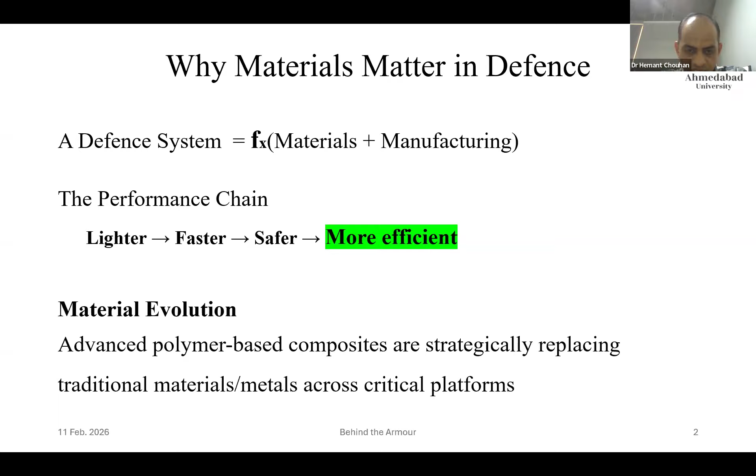In that process, composites or advanced materials play the strategic role and not the conventional materials. That is where it becomes very critical, that we can have a material or a technology initially designed for defense or aerospace, and then it can come down to the normal world, the civilian low-cost competitive environment. That is something I would like to touch upon towards the end of my presentation.

So what are the challenges we face? Defense generally depends on manufacturing capability, and it's not just about R&D excellence, because in my journey I have faced that technologies fail more often at scale up, not at the conceptual level. So there lies a critical gap: is my process repeatable? Can I produce consistently? What are the costing factors? Because at research level, we say that cost is not a criterion. But when we look at forces or aerospace, you have to supply consistently in terms of quality and quantity, and be sure that it will last for the rated lifetime. So what defense needs is a manufacturable design from day one instead of a technology which is only provable on the design table. When we talk of scaling, we face challenges, so we need the design to be manufacturable from day one.

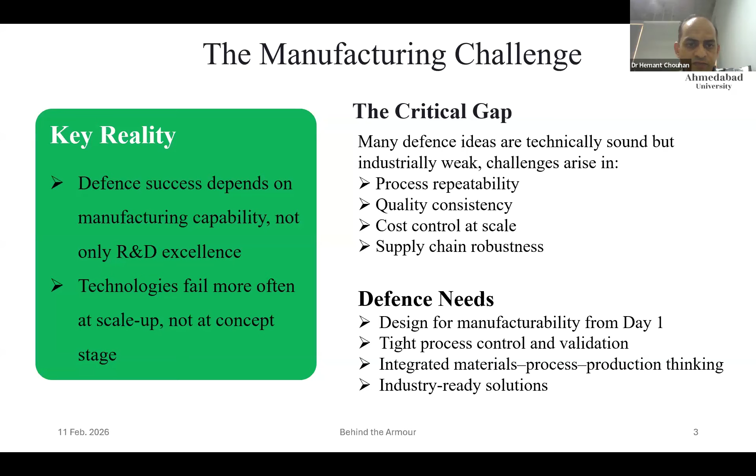We need a tight control over the manufacturing process, control, validation, overall the thought process of production, and that should be presented in such a way that it can easily be absorbed by the industry as a solution. So from this point, I would like to take you through my journey that at research stage, we can develop best of the materials in the controlled environment.

A good quality sample for prototyping and initial testing of force can be done at academia, but ultimately when we are developing a defense solution, it has to go to field for the field testing or the military certification, what we call. So in Indian context, it would be DRDO. You can have an initial tie-up with armed forces or policing, but ultimately it is the DRDO certification that will matter. So we'll come to that as well.

And then they certify that your product qualifies all the environmental or the service parameters as well. Even if academia and defense has developed something, the mass production will always lie with either a public sector or a private sector company who can actually absorb the technology reliably and repeatedly produce the same product in large numbers at cost competitive pricing. And there is a consistent chain right from the raw material to the finished product with the traceability at each and every stage. That is something which is beyond the scope of academia.

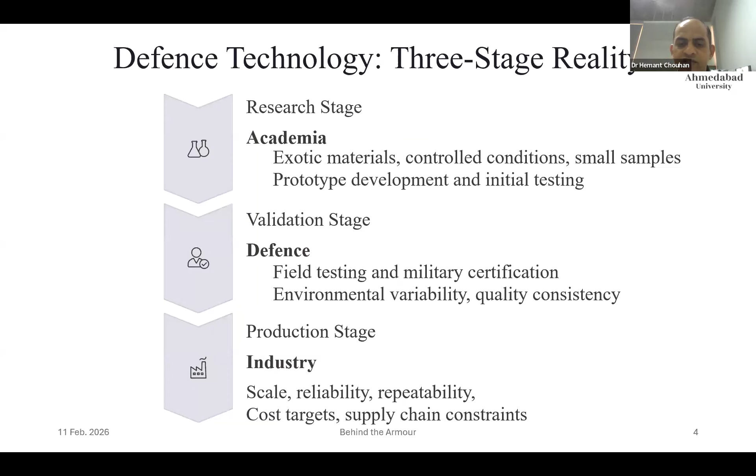We can move from TRL 0 and 1 to maybe at the max 7. The 8, 9, that is field validation, goes to the actual user, that is military in this case, and mass production in any case will be done by industry only. So basis that journey, we found that the materials that perfectly often work in a lab environment, as they migrate to industrial aspect, the things change significantly. So we need to work in such a way that the academia produced products are actually going to serve the nation. Fire. And this is my journey.

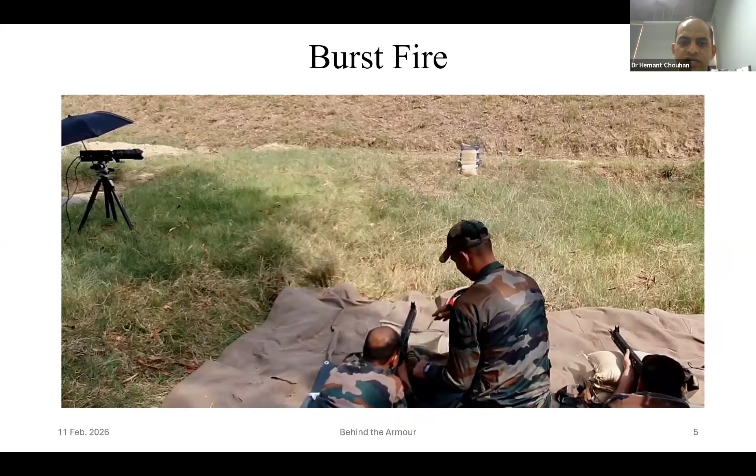So it's less than a second that the journey is over. Now, what all was involved in this journey? And before going into that, theoretically, as per the design, an AK-47 is supposed to fire 600 rounds per minute. Practically, the army people say because of friction and weapon barrel, bullet type, belt type, and whatnot, the practicality is 120 rounds per minute. Still, an AK-47 is firing 2 bullets per second.

And if we have to protect a person from these 2 bullets, which are coming within a time span of 1 second, sorry, 2 bullets in a 1 second time. So it's quite a task. Why it's a task, you'll get to know very soon. Now, when this thing happened, that there is a sound of fire and some bullets were fired, three things happened.

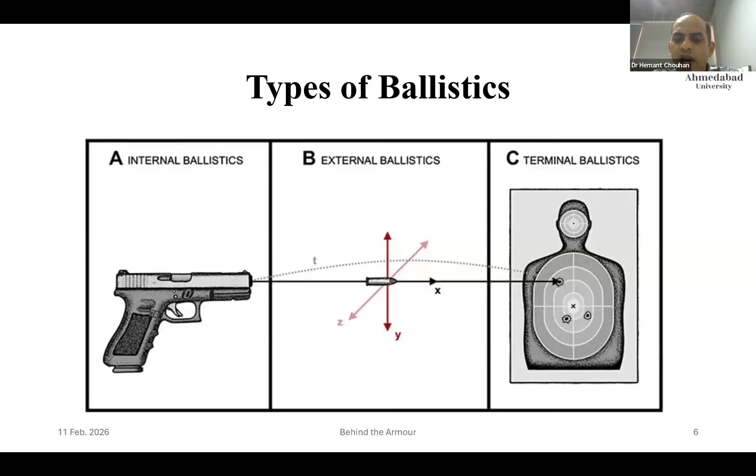There is a term of internal ballistics, that is what is happening inside the weapon till the point the projectile comes into the atmosphere. External ballistics, what happens with the projectile when it starts its journey from the exit point of barrel to the final target. And the final target location, if you are trying to stop the bullet, then we call it as terminal ballistics, that how you are going to handle this projectile. So what do we mean by these?

Internal ballistics basically refers to what is happening inside the barrel. So what kind of propellant, what kind of ignition, what burst pressure, what is the length of the barrel, whether the barrel is smooth or it's a rifled one. Those all parameters along with the aging of the barrel, they will define what is the status of projectile when it leaves the barrel. So you can see a small handheld weapon versus a rifle. So the barrel length changes, the type of grooving and all. They significantly affect.

They affect the journey of projectile, how it will travel in the air from this tip at what speed, whether it's spinning or not, what is the angular velocity, the yaw and precession, what kind of trajectory it will take depending on the location on the earth. The gravitational field will have its own effect, what kind of air resistance and wind drift it is facing, and ultimately depending on distance. Now from the tip of the barrel to the end target, the distance could be few meters to few hundred meters. So accordingly, what kind of residual velocities at the point of impact we are expecting, and this distance we call as the range or the effective range, where this weapon can effectively do its task.

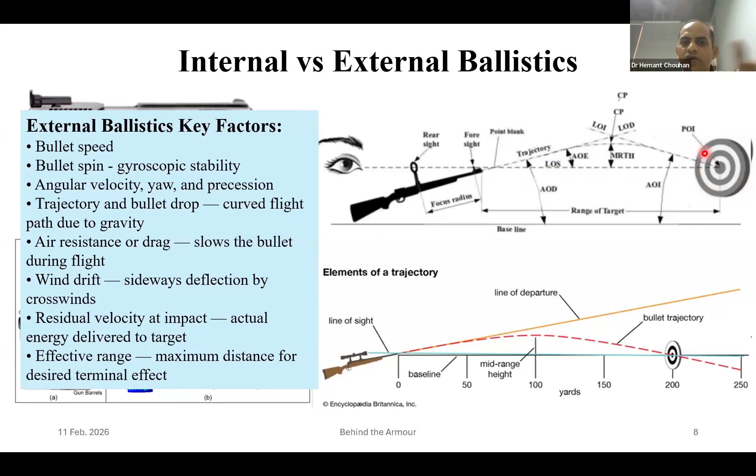Let's call it killing a person in this case. So that is how internal and external ballistics deal with each other. I am more interested in terminal ballistics. That is the study of impact, what happens to that material, will it penetrate or not, and how we are going to handle this impact energy. So that is all about ballistic protection, or simply put, terminal ballistics.

What are the key focuses in this case? Number one, prevent the penetration. If your projectile is penetrating your bulletproof material, the person is dead. Even if the projectile is stopped, what will be the deformation at the back of the panel? If the projectile leads to a significant deformation at the back of the panel, it can lead to, and it does lead to, rib cage breakage, liver or heart or any other critical organ burst.

So that ultimately leads to, even if there is no puncture in the human body, the person is about to die. And these are the versions of the army people whom I met, that the bullet was not penetrated into the human body, but still my soldier died. So those are studies which are not declared, but there are instances, and officially they don't put it in black and white.

Another important thing: deformation is something which we see after the impact. At the time of impact, we actually measure back face signature. What is the peak deformation? From the stress strain curve, we know there are two parts, elastic region and plastic region. Whatever material we are using for bulletproofing application, it will have its own elastic region. So BFD, that is after firing, when we measure the deformation at the back, we call that BFD, that is back face deformation or trauma. But that is the answer when the material has already recovered back, the elastic recovery part of it. So the combination at the time of impact, elastic plus plastic, is going to be higher than the deformation which is only the plastic part of it.

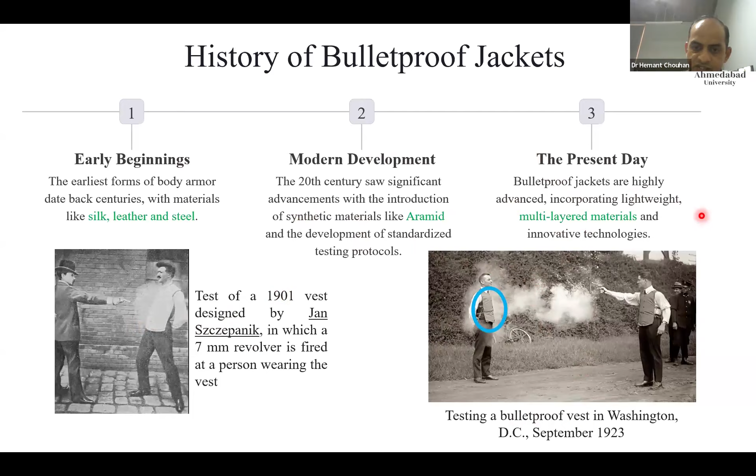Now, coming to the standards, NIJ 0101.06 was the one when we started the journey. This was the standard. Last year, the 07 has come into existence. But more or less, thankfully, the weapons remain the same. NIJ is basically considered the gold standard, and nearly half the globe follows NIJ. Till the end of 2018, India was also following the same. Towards the end of 2018, the Indian government came up with the BIS standard for bulletproofing. We'll discuss that later.

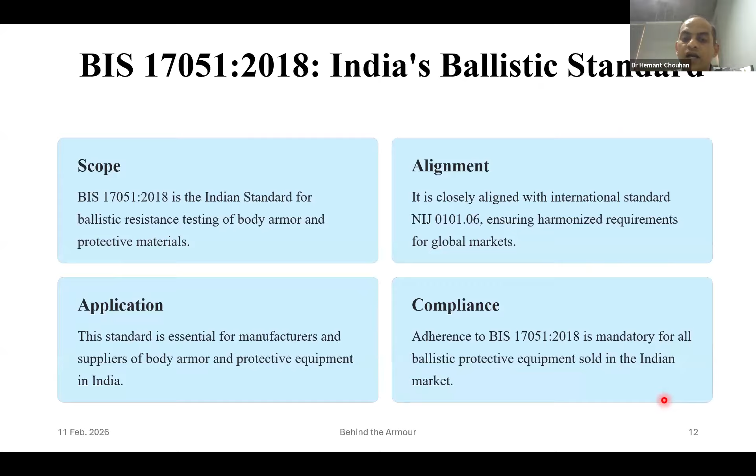In 2018, BIS 17051 came into existence, derived mostly from NIJ, of course. So it aligns very well with that, with the specific requirements of Indian forces. Now, if one has to supply any kind of policing or military related bulletproofing system in the Indian market, then they must meet the BIS. And in fact, the army requirements are even higher than that. So I'll discuss that now.

And the largest projectile that can be fired by a person alone, without any mounting or any vehicle or tank or chopper in the picture, is from the Russian Dragunov, that is 7.62 cross 54 R API, that is armor piercing incendiary. It was primarily meant for puncturing the fuel tank of a tank, and that's why it's called armor piercing incendiary. It has a sparkling element, basically a magnesium phosphorus combination. It is supposed to pierce the fuel tank and then ignite the fuel, so you need not bother much. The vehicle itself will burn out of it.

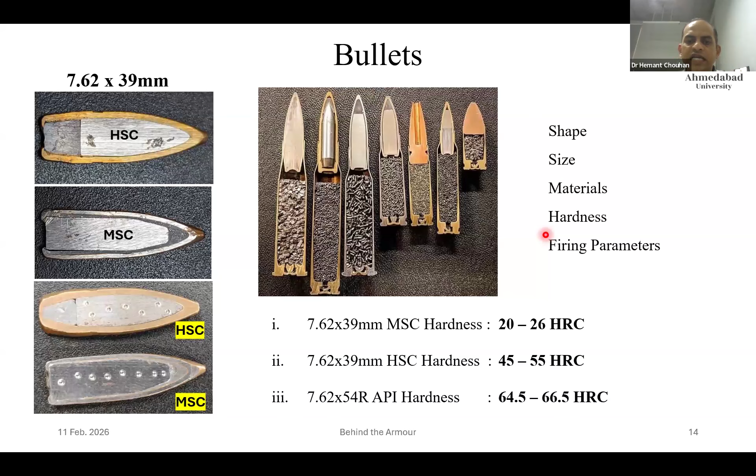Then we have a variety of shapes, sizes, materials, hardness, firing parameters, and the type of explosive being used that will define the velocity. The rifle will define the bore type, smooth or rifled, and if rifled, what kind. So there are so many parameters to be handled. Still, finally, we know that there is one for this and one for that. Now, this was just one of the random discussions. One company from Europe said, no, right now we have 7 options, whatever number you require. Now, all these bullets can be fired from an AK-47.

And we can see there are 7 different types, each one having its uniqueness. So that is where the game becomes more and more complex, how to deal with this kind of scenario. And then coming back to the BIS thing, these are the standards for how much body coverage should be there. So I'll take only one of the parameters.

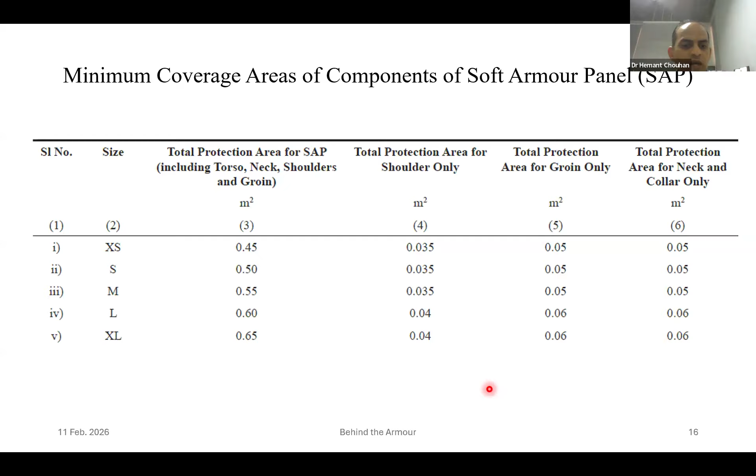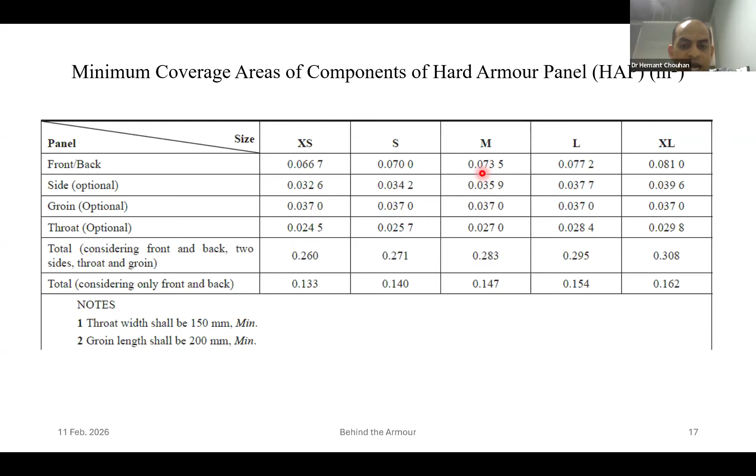Let's say the front, that is the chest of a medium size male. The BIS says that the requirement is 735 centimeters square to be taken care of. But Indian Army demands 1000 centimeters square. The BIS says 6 bullets to be fired, but Indian Army says for AK-47 you need to fire 8 bullets on 1000 centimeter. And for sniper, the global requirement is minimum 1 and maximum 3 bullets, but the Indian Army says rather, 6 rounds to be fired. So that makes the game more and more complex.

Going to the rest of the world, you have European standard, you have NATO standard, you have Australia, New Zealand, Europe, Germany, and so many standards. It simply means so much of variety. And whenever there is a variety, it is from both sides. So I call it a virus versus antivirus. So we are the antivirus developers, the protection side of it. But then the science is also growing in the direction of killing machines.

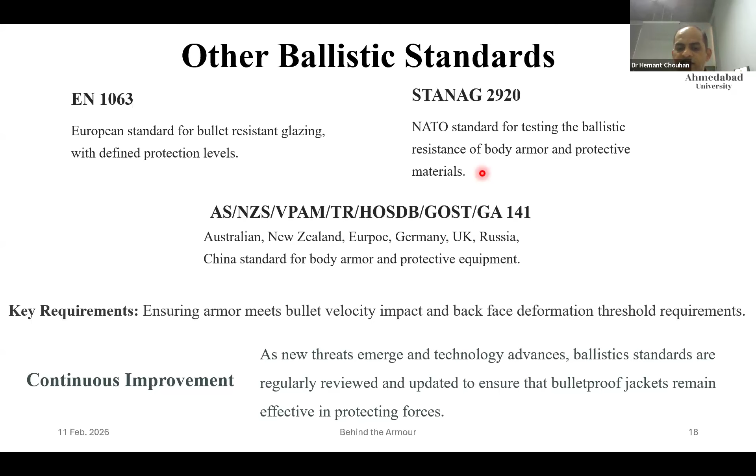There they keep on enhancing or trying to speed material change. Material change is one of the things which is very easy, because your outer cover will always be a combination of some copper brass thing. So you can never know what is the actual hardness and what are the actual inside parameters of the material. So the key requirement is that my armor must meet this impact of a projectile, which I don't know what is inside. And we have to ensure that the back face deformation and back face signature is well within the permitted limits. Otherwise, you are out of business. So there is a constant need of technology improvement as the ballistic standards and weapons grow. So should my jacket grow.

Now, talking of the weapons, this is the smallest bullet. And before we enter into it, let me tell you that a blow of 25 to 150 joules on a human head, properly placed, is sufficient to kill a human. The smallest of the weapons, this is the one which you can see anywhere, a pistol on the back of a policeman. He has this restricted bullet, what we call 9 cross 19 mm, fired at 430 meters per second. And even that is producing more than 650 joules, so sufficient to kill. Talking of AK-47, that is 7.62 cross 39 mm, the energy is much higher.

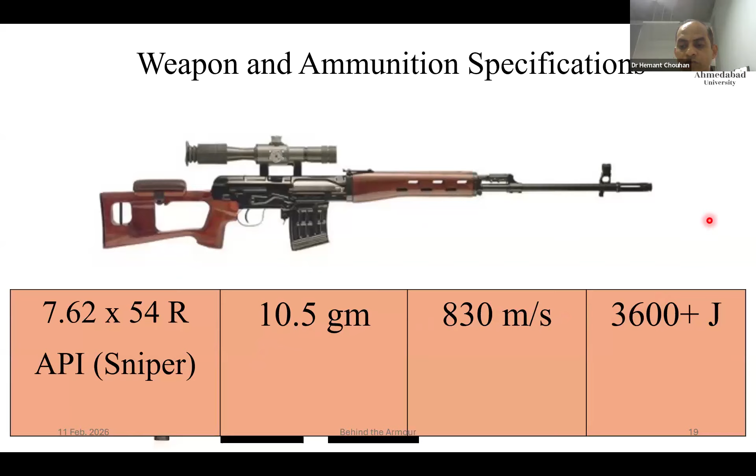The NATO standard weapon is above 3000, and the highest of all is a Russian Dragunov, in context of the Indian market, because in the Indian context we call this the sniper, not the US one. So the weight goes slightly higher from 7.5, 8 to 10.5 gram max, and the kinetic energy is somewhere like 3600 joules. Whereas one sufficient to kill a man is somewhere around 150. And now the Indian Army is demanding that no, don't stop just 3 bullets, stop 6 bullets. So that makes the game very, very difficult.

The best possible solution can be some advanced material like composite, where when two become one, they are stronger than both of them individually, what we generally call fiber plus matrix. That is a high strength unidirectional kind of material with a homogeneous isotropic polymeric material.

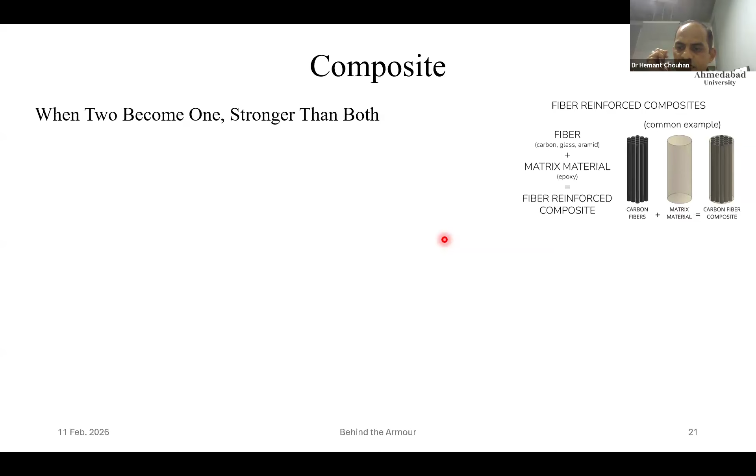That way we can make a judicious combination to come up with a solution for high strength application, not necessarily along the axis of fiber, but perpendicular to that. So fiber will give me strength and matrix will ensure the shape is retained properly and there is sufficient adhesion between the two, so that we come up with a composite system wherein I can design the strength of the composite. And this is what I call the design triangle, that I can design a material somewhere less than the fiber strength and much higher than the matrix strength.

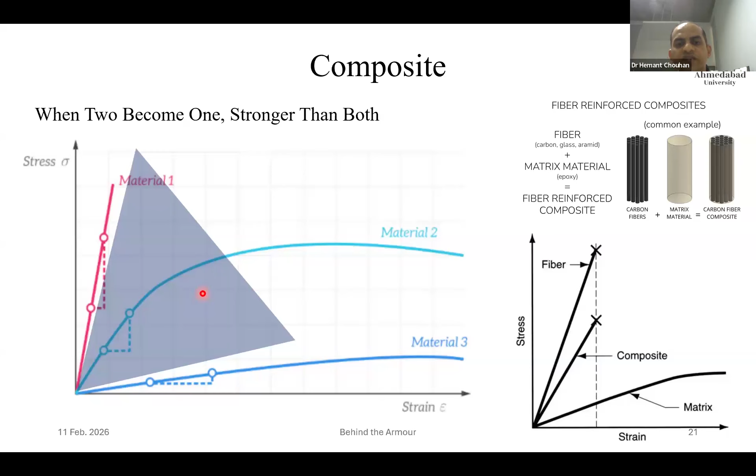Now, depending on what kind of behavior I want, brittle or ductile or in between, what kind of modulus and what kind of deformation, the design triangle is yours, so you can design any material within this regime, which otherwise is a very, very difficult task when we talk of the conventional materials. So that way composites give us a freedom.

Knowing this, what all options are there? Since we have 6 types of bullets, from this point we will limit ourselves to only BIS. So we have a 9 mm bullet, and then all others are rifle. A small weapon is the one which can be kept inside the pocket. A 9 mm bullet will be fired using a weapon which can be kept in the pocket. There are weapons which are slightly longer than that as well. All others are rifle. So in that case, a soft armor panel is sufficient to stop the small bullet, but a hard armor panel is a must when you are firing a bullet using a rifle.

Now, what all parts will be there in a typical bulletproofing panel? To ensure that back face deformation is well within the limit, we require a soft armor insert, which will ensure that the deformation, the BFS, is taken care of by this material. And this should be sufficient to stop a 9 mm as well, the yellow thing. If there is a rifle bullet, then we require multiple things. If it is a mild steel or lead bullet, which is a soft material, only Kevlar or UHMWPE, ultra high molecular weight polyethylene, is sufficient to stop the projectile. If your bullet is harder than this, that is, it has got hardness much larger than the mild steel, then we have no other option but to incorporate a striking face material.

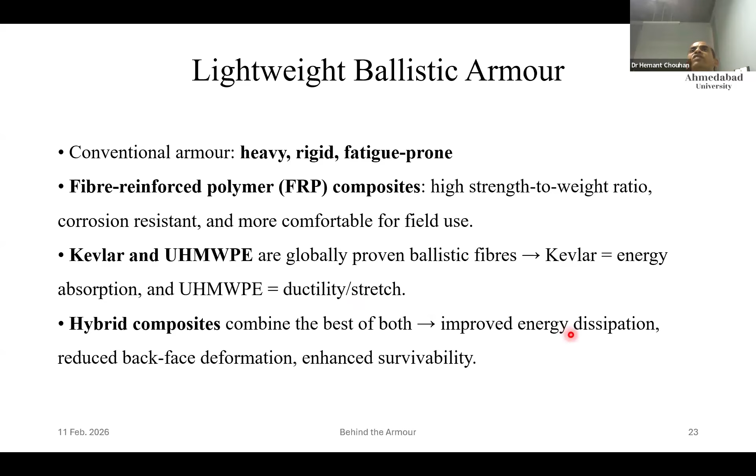And then we have a hybrid, combining the best of both. How we are going to do that, I will discuss later. With the combination of the material system, we can have improved energy dissipation and optimize the back face deformation. That way we try to increase the survivability chances of a person wearing it. Now, before going into that, we should try a simulation model. So for this particular Abhed bulletproof, we opted for LS Dyna because that is the best for the solution.

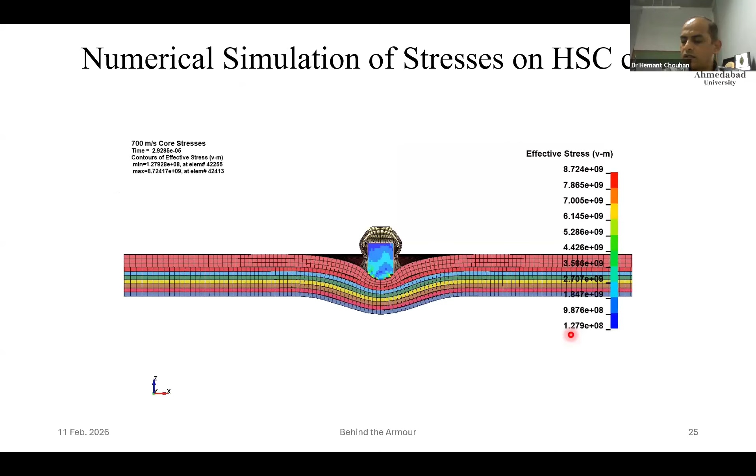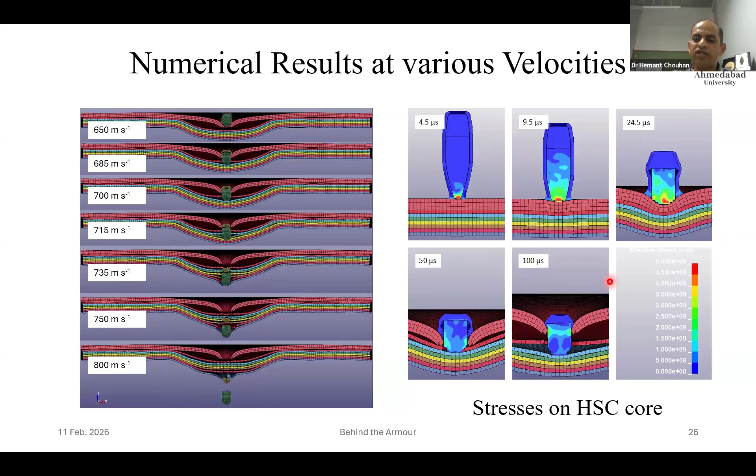And in the Indian context, we always have plus minus 15. So 725 is the highest speed. At 735, we have designed that the tip will get exposed. The bullet is not penetrating as such, but it might be visible at the last. Less than this, at any value, your bullet is well within the composite. At 750, it is penetrating, and at 800, for the same set of parameters, it will actually perforate completely. So these are the instances at the various time units, and the kinetic energy available with the projectile after the completion of this much time.

So we see that after 0.04 into 10 to the power minus 3 of a second, the 800 meter per second bullet will still have more than 100 joules of energy. This is still a lethal one, sufficient to kill or significantly damage a human. Whereas as we go down, the kinetic energies are nearly zero. So for 715, it is zero. So we are having a very good model. For this case, we have used LS Dyna. Abaqus is equally good, but for bullets and these kinds of events, LS Dyna is preferred. So we have been into that.

But this problem is not that simple, because in the previous slide we have seen that one bullet is handled, but in reality, as per NIJ for AK-47, you are going to fire 6 bullets. So in simulation, you have to fire 6 bullets one after the other. In the real test, the material will get sufficient time to recover. A bullet is fired, we see the panel, take it, turn around, check whether it is perforated or not, and set the system for the next round. In the process, typically 8 to 10 minutes are gone.

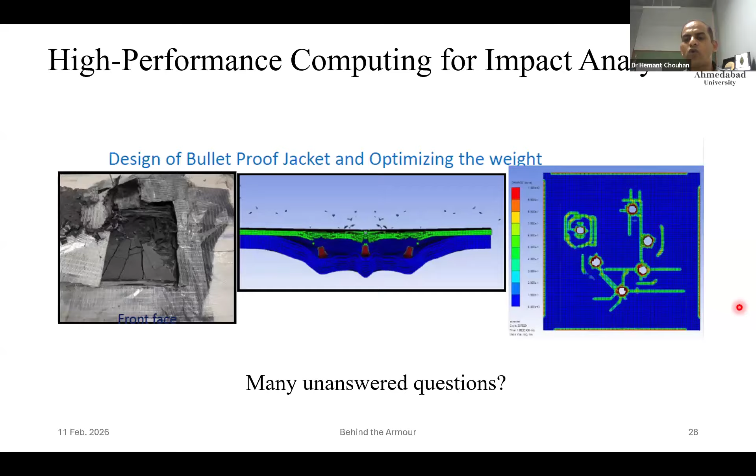In simulation, we are firing only one bullet, so your panel is intact. But after one bullet, what will be the level of the panel? What kind of damage and delamination has happened? We don't know. This is what happens when a single bullet is fired. The bullet is stopped, but what is the condition? And this we did explicitly to see how these damages and cracks go. There are many unanswered questions in the case of simulation, because simulation will limit itself, saying that the bonding is perfect and the delamination will follow a perfect mathematical rule, which might not happen in the real world scenario. So for that, what all ballistic materials are we going to use?

The backing side of it, that is the soft side, is ultra high molecular weight polyethylene, and before that it was Kevlar. PBO is a very good fiber. It came up as a game changer, and very soon it was observed that environment is an enemy to it, so it won't last long. Whereas when you make a bulletproof, it should survive for at least 5 years.

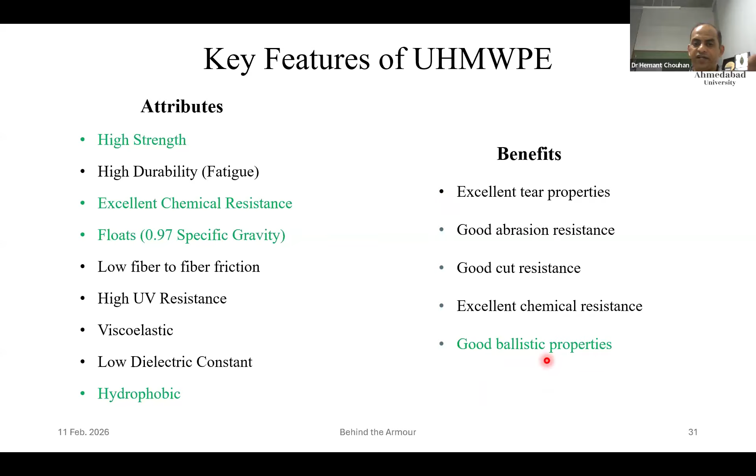And these are polyethylene, I hope you all know very well. We use polyethylene for waterproofing purposes, so they are hydrophobic in nature. Plus they have excellent tear resistance, good abrasion resistance, good cut resistance, chemical resistance, and above all, the best is that the ballistic properties of this particular material are the highest to date. With that, we have an open field in which we can develop an even better material.

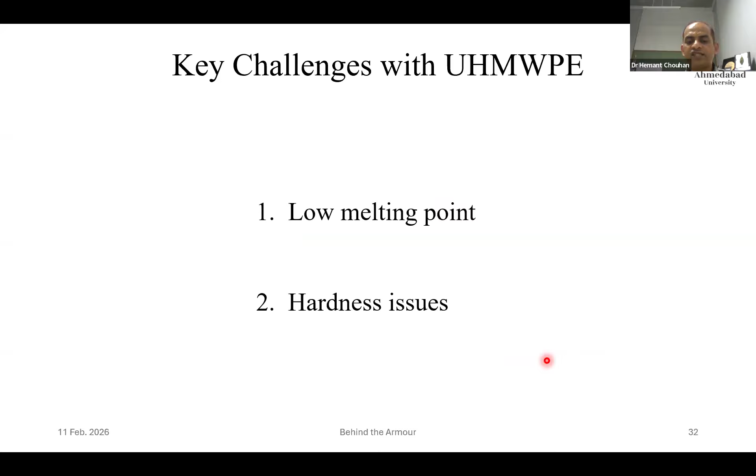The only issue with UHMWPE is the low melting point. Polyethylene, we all know, even if you increase the molecular weight, you can't change the melting point. And being plastic, don't expect very high hardness. Yet, multiple layers of this material can successfully defeat lead and mild steel core bullets. So that is a good feature for us.

Talking of the moment we have to migrate from soft core bullets to hard bullets, that is HSC or sniper, you have no other option but to place a higher hardness material in front of this polymeric backing. So a homogeneous material with very high compressive strength but very low strain to failure is an option, and that is where ceramics come into the picture, because we are not interested in metal for the weight penalty reason. Normally we have ceramics in the form of powder, and then they are suitably processed to give us tiles. Now this can be a monolithic tile matching the dimension of your BP panel, or they could be in the form of multiple small mosaic tiles.

They are to be placed on top. So in my case, let's say there were 107 small tiles which are to be placed on a compression molded UHMWPE panel. The aim basically is to get good ceramic processing so that we can successfully defeat these 6 to 8 projectiles of high hardness.

If not done satisfactorily, then your fourth onwards bullet will perforate the laminate. And the best of the ceramics are boron carbide, silicon carbide, and aluminum oxide. Though this one is preferred for blast, it is not preferred for personal protection because of its low efficacy compared to these two and higher density compared to boron and silicon.

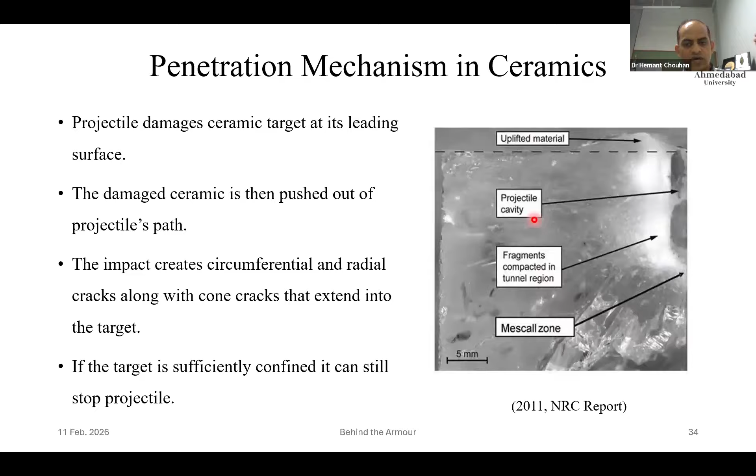Once your projectile is broken into more than one part, you are going to handle multiple pieces, but thankfully at a lower kinetic energy, because the initial kinetic energy was a constant number. Now it is broken down into multiple pieces. So handling becomes both easy as well as difficult. If it is broken down and before that the tip has been eroded very well, so there is only a blunt part. Handling a blunt part is much easier than an ogive nosed high hardness material. So that way we are going to play with that material system, both the parts, projectile as well as ceramic.

So what happens? What is the mechanism behind? As your high hardness projectile will enter into the ceramic, a damage zone called the Mescall zone will be created. Initially, it will try to push the material. As an outcome of that, there will be an extension or tension at the back of it. And we all understand, with a cup of tea in my hand, ceramics are very poor in tension. So if there is not a sufficient backing, it will fail very comfortably. And that is where the role of a backing comes into picture. We require a very good backing which will take the energy and not allow this tensile deformation. Otherwise, my ceramic has already cracked. So that is the first thing.

Then we have this projectile, which will try to compress or push away the ceramic material in front of it. That will lead to the breaking down of the ceramic tile into a powder. We call it comminution. Because of the high shear stresses, the solid tile is now being converted into a ground powder kind of a thing. And then there is a high pressure which will try to extrude this material to the sides, and the projectile will keep on moving further down. So this entire mechanism will ensure that the energy is absorbed, the projectile is ground suitably and broken down, and if backing is sufficient, my ceramic will retain its position without giving way to the projectile. If this does not happen, then we are going to face a challenge.

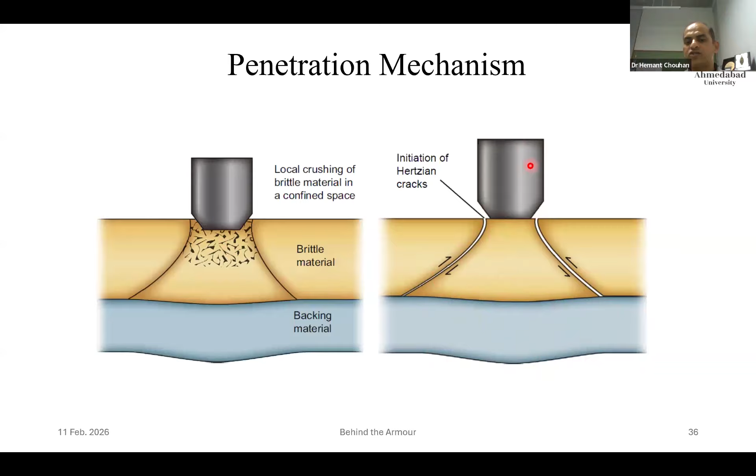In another study, they mentioned that this is the comminution zone. The crushing will happen in front of the projectile, and there will be a crack growing from the tip towards the back, and this is where we see the tensile deformation of the ceramic. If this tensile deformation is allowed because of lack of stiffness of this composite backing, then your crack will grow very fast, and in that case the projectile will enter, and there will be a shear plugging phenomenon happening throughout the object, because in any case this composite backing has no strength or hardness to actually deal with the hardness of a hardened projectile.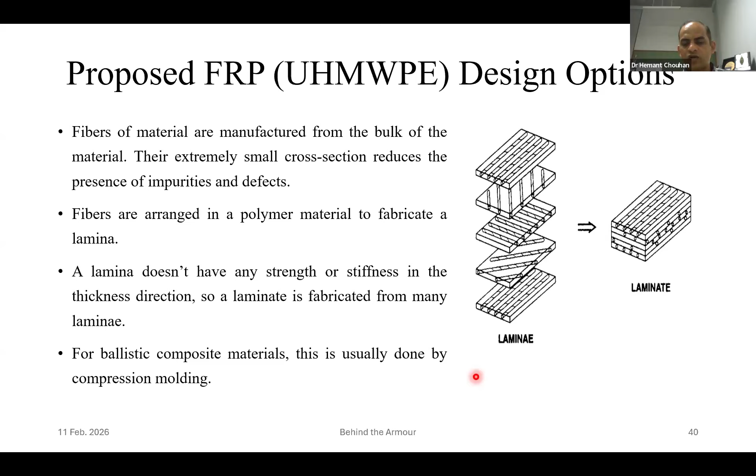UHMWPE we are using in the laminate form. So you have unidirectional fiber. There are two global masters basically. Earlier it was Dyneema and Honeywell. Now the Dyneema is taken over by Avient. So we have Honeywell Advanced Material and this Dyneema thing. Now, before going into actual panel manufacturing, we need to understand, shall we rely upon the properties

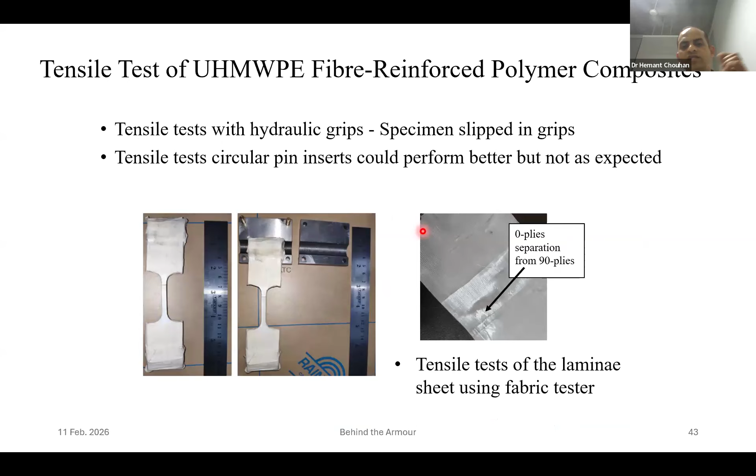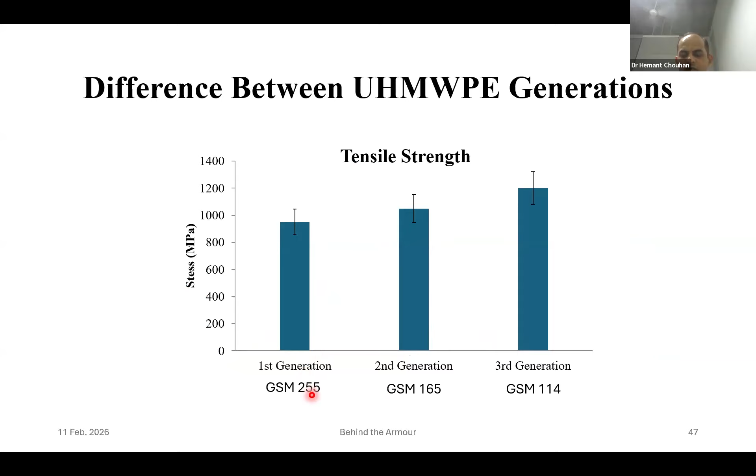Typically, the strengths are somewhere between 800 to 1400 megapascal as per my testing. And we found that as the generations grow, the GSM, that is gram per square meter, a term you generally come across with respect to paper, is going down and strengths are going up. So that is the beauty of UHMWPE and how the tenacity is helping us. In future we are expecting that there will be a fourth generation and the strengths will go even higher and the GSM or the weight per layer will go further down.

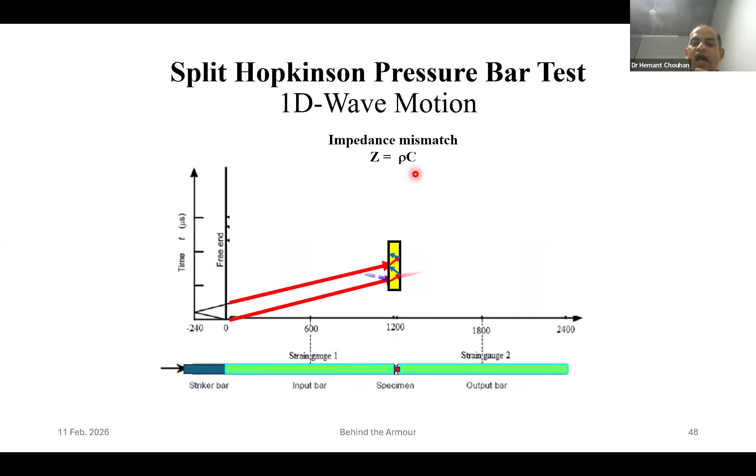Now, this is the typical mechanism of a split Hopkinson bar, wherein a striker hits a homogeneous material. As an outcome of that, a compressive wave travels through this particular bar, and we have placed the specimen at the center of it. So, depending on impedance mismatch, which is a function of density times velocity of sound in a material, the reverberations of this stress wave will happen and we will have a reflected and a transmitted wave, and these three waves, that is the incident, the reflected and the transmitted, will tell us the material properties.

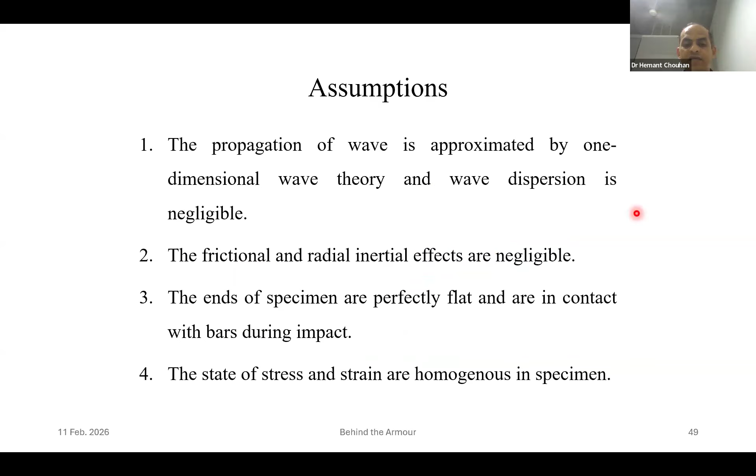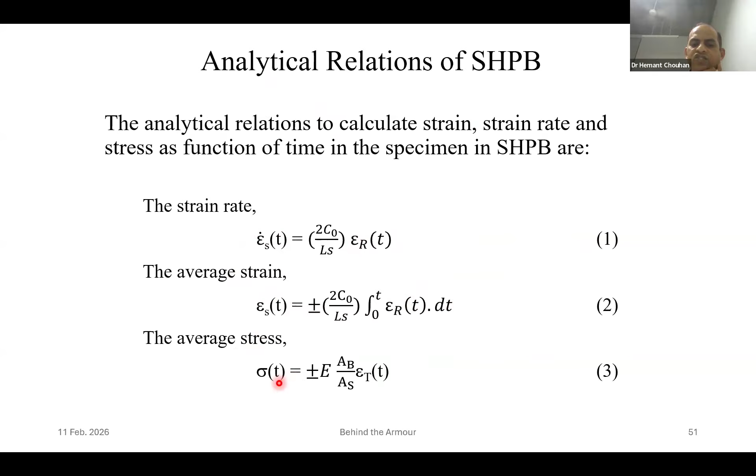And for that, we have some assumptions that everything is in place and correct, because we are not doing things in a three-dimensional world, but in a 1D phenomenon. So if this is the case, then this is my incident energy, a reflected one and a transmitted one. We superimpose them and using a mathematical formulation, of course, this is strain gauge data, it has to be suitably converted. We can measure the strain rate, average value of strain and stresses. So that way we can characterize the material at high rates of loading. And this is how the event goes.

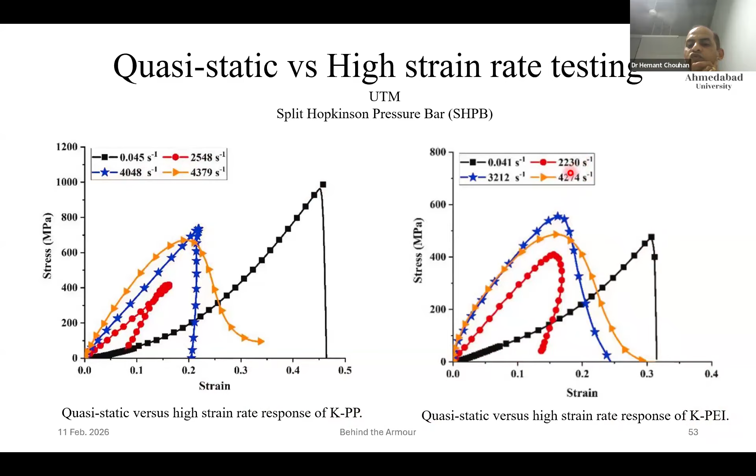So how this helps us, this is for Kevlar. Kevlar polypropylene, we observed that Kevlar fiber remains the same. Under the UTM, the strength for this particular specimen is more than 1000. And in the high strain rate regime, though the numbers are growing, compared to quasi-static data, these numbers are low. As the strain rate grows, the strength seemingly increases. Now, for the same Kevlar polypropylene, this is Kevlar 129, if I change the matrix from polypropylene to polyetherimide, which is a very hard and brittle polymer, your quasi-static data has gone down and the high strain rate data is still constantly moving up as we move from somewhere around 2000 to 4000 plus strain rates.

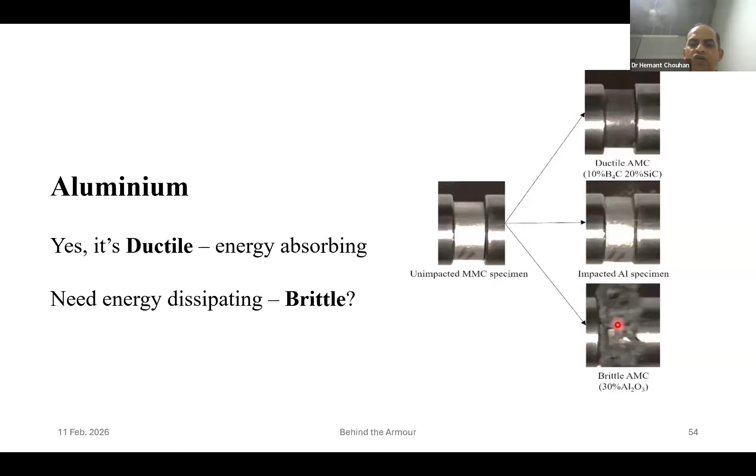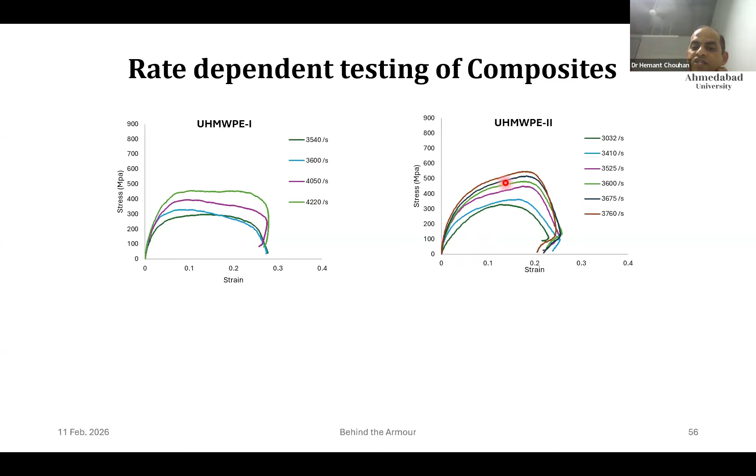So we also did the simulation of this, and we tried to figure out if we can perfectly match for UHMWPE. So close to 5,000 we performed the experimentation, and we found that simulation results are more or less exactly matching with the experimental one for UHMWPE. These are the first generation materials wherein there is an elastic viscoelastic zone followed by a constant plastic region, whereas in generation 2, now when I say generation, it is not by us but by the Honeywell people, that they developed the better version of fiber or the overall composite system lamina. So there is an elastic as well as plastic region, there is a constant growth in the stress, and the present generation is even better than that, and this is where moving from 250 plus GSM we have come down to 144 GSM, and your material properties are constantly improving under the high strain rate loading.

Now, how do we manufacture a laminate out of it? So for UHMWP or for the composite part of it, compression molding turns out to be the best possible option. So compression molding is a standard process wherein we place the desired number of layers inside a lower platen, which is a hot surface, and there is an upper platen as well which is also hot at the desired temperature, let's say 100 degree or 130 degree depending on the polymer properties or the matrix material. We close this, apply the rated pressure for designated time along with the vacuum, cure it.

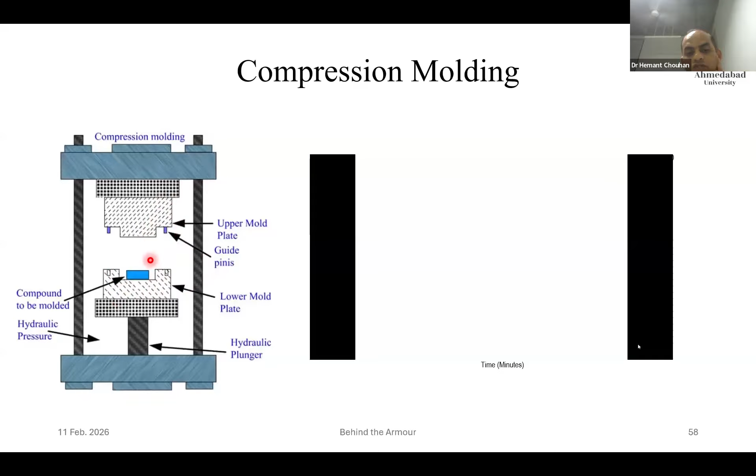I won't go into this video. I don't have time for that.

The key thing out of this compression molding is that, okay, we have devised the process and that is good enough. No. There are so many variables that can comfortably affect the final outcome or that will lead to the ballistic properties variation in our case. So if I change the molding pressure, so we studied this, the pressure was in PSI though. So 34.5, if I make this molding pressure increase by 4 times, the same composite laminate is giving me a strength of somewhere around 450 to 600 MPa. Simply by increasing the pressure, let's say these are 10 layers. So my 10 layers were resulting into 445 megapascals of strength in compression. By increasing the molding pressure by 4x, my properties are improved significantly.

Then we have the number of layers, the time, and the molding temperature. With a given machine, we have a variety of ways to deal with the material system, so we can play with the properties of the same material. And then this is a quasi-static data. Again, at high strain rates they will again vary.

If my compression molding is done perfectly, I can do a non-destructive test called an ultrasonic scan. So you have an A scan, a B scan, and a C scan. This particular thing is the throat panel, that is, this portion is to be protected from the rifle threat. So this is a hard armor panel meant for throat protection.

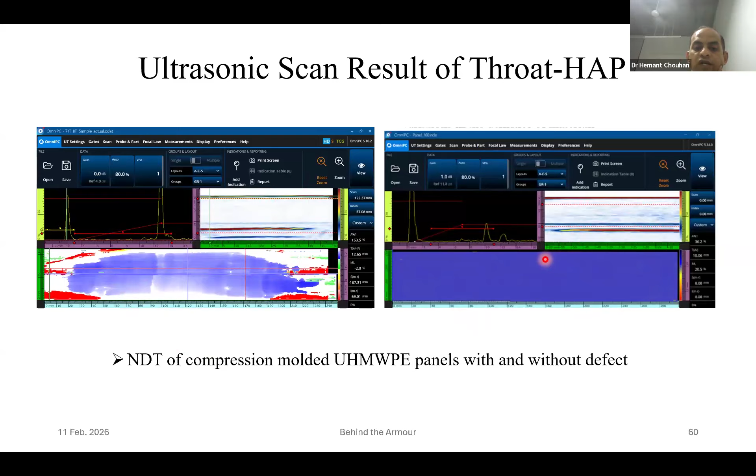If your compression molding job is perfectly done and you have the right ceramic with you, then we can move on to integration of ceramic in front of UHMWPE. For that, you will require an autoclave. So we have our compression molded panel. Then we have the ceramic tiles. We place them on top of this UHMWPE panel and cover it with a different material for the impedance matching property so that it behaves in a better way.

So we have been using Kevlar in this case, and then we wrap this UHMWPE back, ceramic front with Kevlar. And this is where you can see, UHMWPE is a low surface energy system. Ceramic backing is the one part which will interact with UHMWPE, and Kevlar is altogether different, which will wrap this entire thing inside. So I need at least two different kinds of adhesive, and this is a typical autoclave cycle: along with time we keep on increasing the temperature and we apply the desired autoclave pressure. I am assuming you are familiar with compression molding and autoclave.

And then once we are ready with the panel, whether it is purely UHMWPE for mild steel or lead core bullet, or an autoclaved panel for hard steel, we go to a gas gun. This is a facility which we've developed at my alma mater, wherein under a single roof we have the design, manufacturing and testing. So this is a gas gun shot. Now this should run. So this is the simulation running.

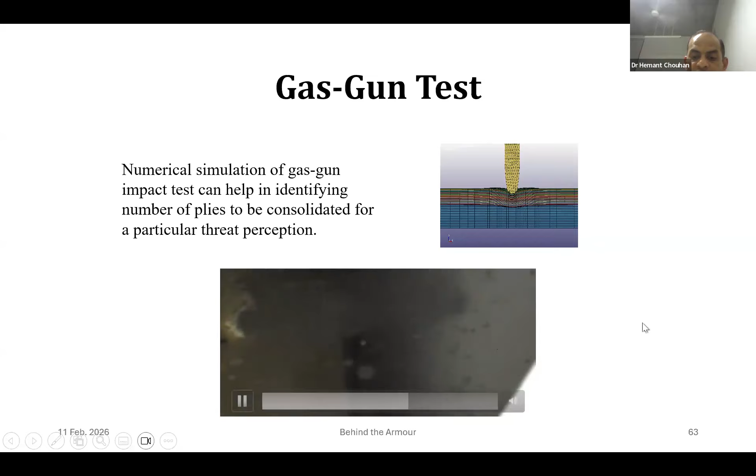And here you can see the bullet of an AK-47 firing upon the panel, captured with a high-speed camera. And this is the debris of the ceramic. These black particles are basically the boron carbide particles. So ultimately what you are producing is a UHMWPE backing, and on top of that you are going to have boron carbide, and then wrapped with Kevlar. This is just for your better understanding of how things are.

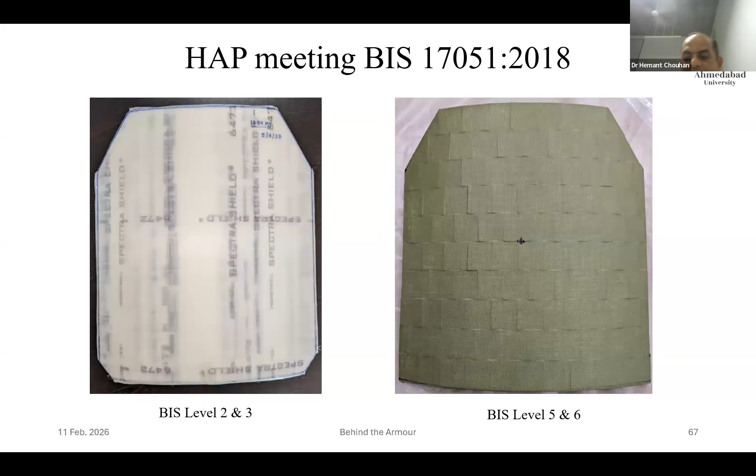So by this we developed BIS level 2 and 3. This is how the panel looks, meant for 8 rounds of AK-47 or the BIS level 3 mild steel ball. And this one is the type of panel which is made for BIS level 5 and 6, that is AK-47 and sniper with hard steel core projectile.

Is this sufficient? No. These panels are to be tested against thermomechanical conditioning and wetting parameters. So you have to make sure that because of moisture your panel is not damaged. Different standards have different times. So we provide a sealing to this panel, and then this panel has to be dipped inside a water tank at least more than 100 or 150 millimeters. So there is a water head requirement.

In case your pouch is punctured or your material is affected by moisture or water, it will serve as a lubricant and your bullet will perforate like anything. So if this is made out of Kevlar and water touches the Kevlar, there is no need to test the panel. It's bound to fail. Then in thermomechanical conditioning, there is an 11-day cycle, at the end of which, on the 11th day, your panel is equal to a 1-year or 5-year aged panel. So that is basically the aging cycle for a hybrid panel, so that after 5 years also it should stop the bullet. And this is how we test it.

So in the defense, TBRL Chandigarh does it, but in the field I've got this thing tested so that I can explain. The tip of this rifle is at a distance of exactly 10 meters from the panel. We are going to place the panel, and this is a velocity measurement system, and this is the overall scenario.

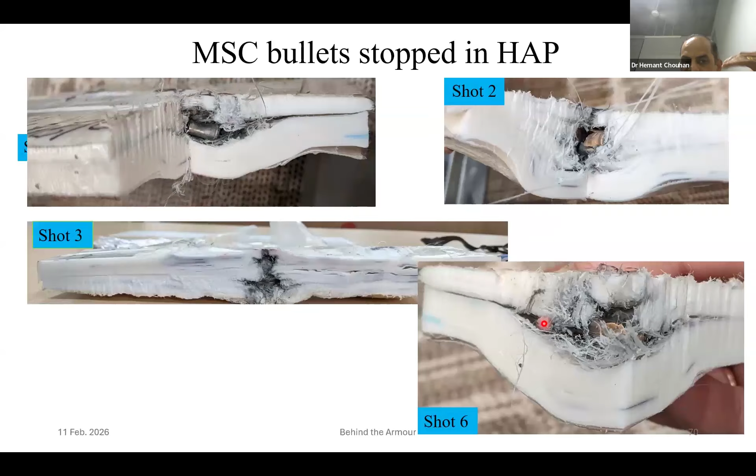If it is a mild steel, then we try to look at how far it has gone, how the damage was, till what depth the damage has happened, because these are the parameters which are not just going to tell us that okay, the bullet is stopped or not. That's fine, it's stopped. But how are we going to come up with a better technology, a better solution, the next version of it? For that, we do the operation analysis.

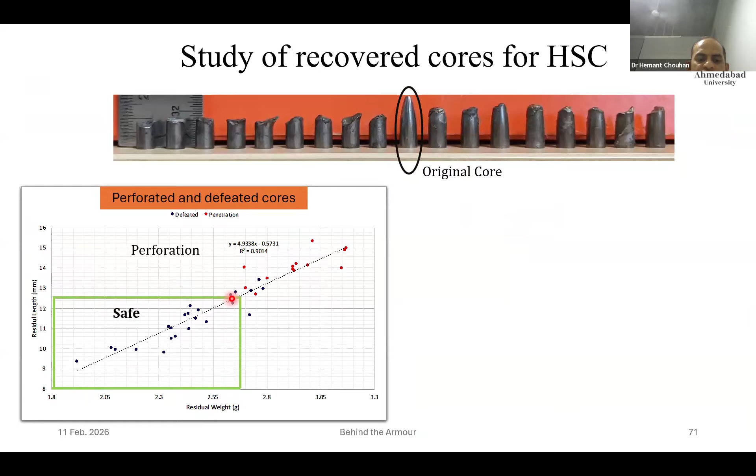If it is a hard steel core bullet, then also we recovered n number of AK-47 fired, and you can see in this image the left side all are smaller and the right side all are larger. So we performed an analysis and found that this is the safe zone. By knowing the weight of the remaining core, this is the original core of an AK-47 hard steel. If the weight is less than this number and the remaining length is less than 12.5, then your bullet is stopped, else it is perforated. So we developed a correlation basically, and erosion is primary, whereas in the previous slide, the mass will remain constant.

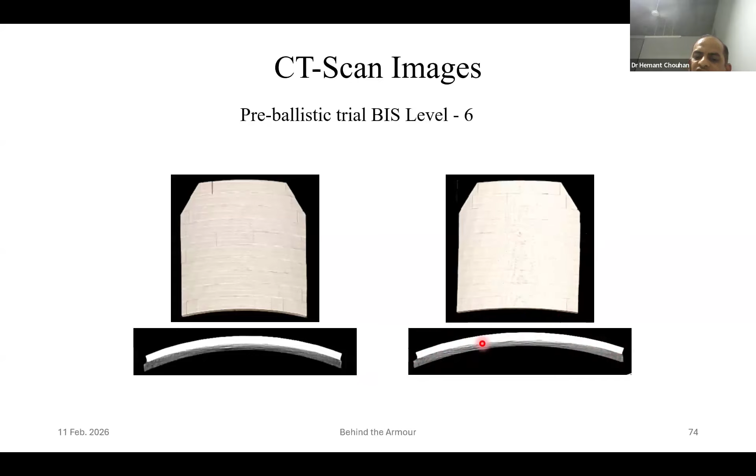Not just the destructive, we do perform a lot of non-destructive testing. So CT scan is one of them, X-ray or CT scan. So here is a tested panel of AK-47. I would like to show BIS level 6, that is one tested with sniper. Here you can see the shining white part is your ceramic and the backing, relatively grayer, is the UHMWPE backing, and these are the 6 shots. So 1, 2, 3, 4, 5, 6.

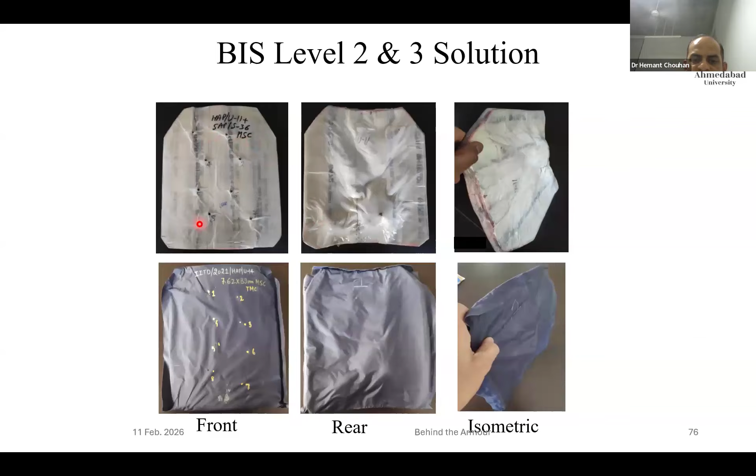They are not telling that the bullet is stopped. That's fine, the bullet is stopped. Where exactly did it get trapped? What was the total deformation and how to improve upon this is the key result we are looking for once we have stopped the bullet. So these are the finally tested panels. These are all 2023 jobs which were done. So you can see mild steel core AK-47, the front, the back, all bullets are stopped.

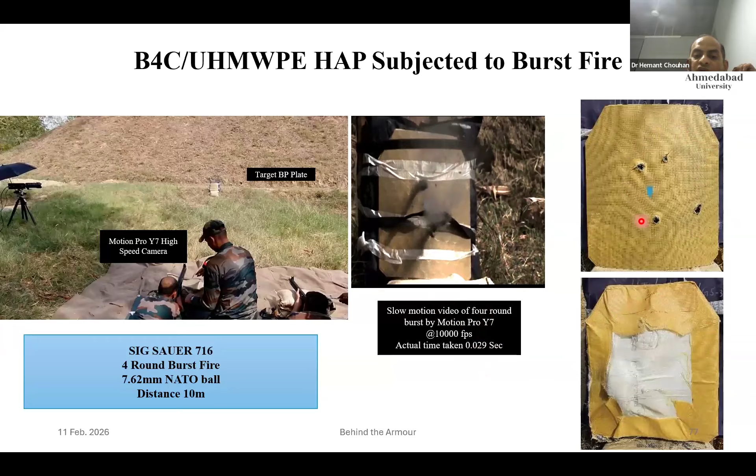Now this time of 0.029 second is the key. The second bullet will come after this much time. Before it could handle that 3000 plus joules of energy, there is another 3000 plus joules of energy. And within the next that much of time, we are going to get one more such shot. Fire. And then a variety of panels and variety of projectiles. So the same thing was also done with this 7.62 by 51 mm.

So this one shows what happens with a 9 mm bullet, and this will happen inside the muscles of a human body if we assume it to be like that, because this is something like a piece of cloth, and these are the backs of these panels where we see that there is no perforation.

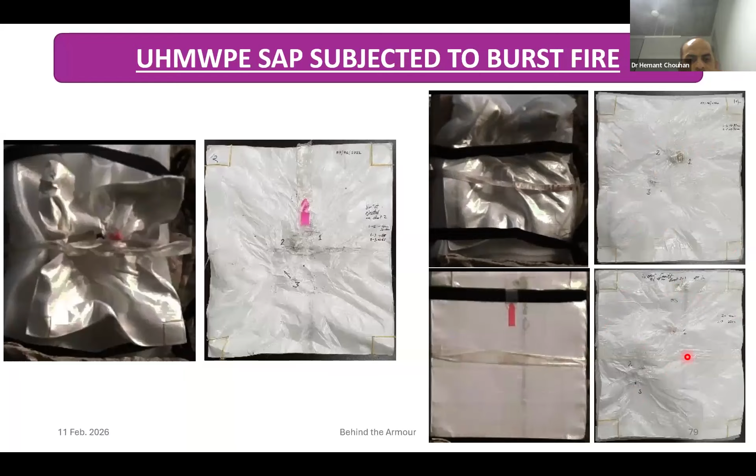So this is the technology which we could deliver to the nation, equivalent to NIJ 06 as per BIS level 6. That is, instead of 3 bullets of sniper, stopping 6 bullets, and as per BIS level 5 jacket, instead of 6 AK-47, stopping 8 AK-47, and the others, the lower ones, are always a comfortable job, meeting the requirement of the Indian Army's GSQR 1707.

When we started this journey, the threat level was, the solution by DRDO was at 10.4 kilograms. We could bring it down from 10.4 to 8.2 kilograms, and there was no solution globally available for a sniper threat meeting the requirement of 6 rounds. We could develop the solution weighing 9.5 kg, which is even lesser than what we were at for level 5.

So this technology is presently under transfer. The public sector company has taken it as MIDHANI, and there are 2 private players who are absorbing this technology. So that transfer is in progress while we are discussing here. These are a few glimpses of where we are presenting to the Prime Minister and the cabinet ministers about this particular thing, which was delivered to the nation in December 2024. And a lot of media coverage was there for this thing.

We don't have time for that. You can come to that later.

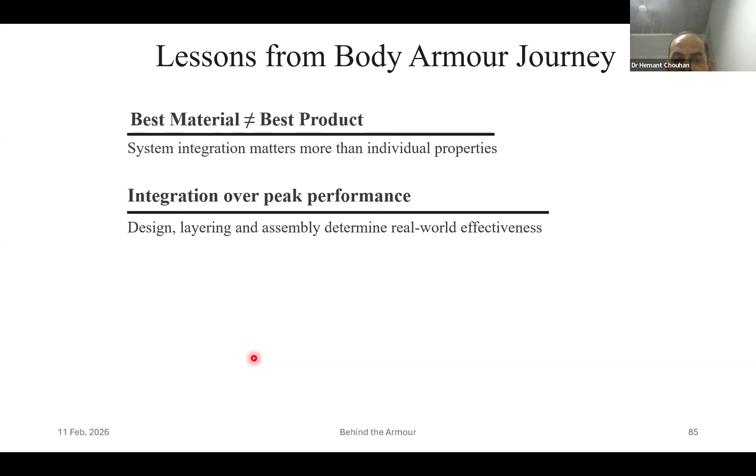So designing, layering, assembly, make sure that it is effective in the real world scenario, and testing and validation are ultimately the key, because you might be claiming anything, but it's the defense department who will clear your product for the desired task. And cost along with the repeatability is more important than a once in a while peak performance. We have to make sure that the lab scale project, even if it has slightly lower properties, if it can be produced in masses, is more important than a once in a while kind of phenomenon.

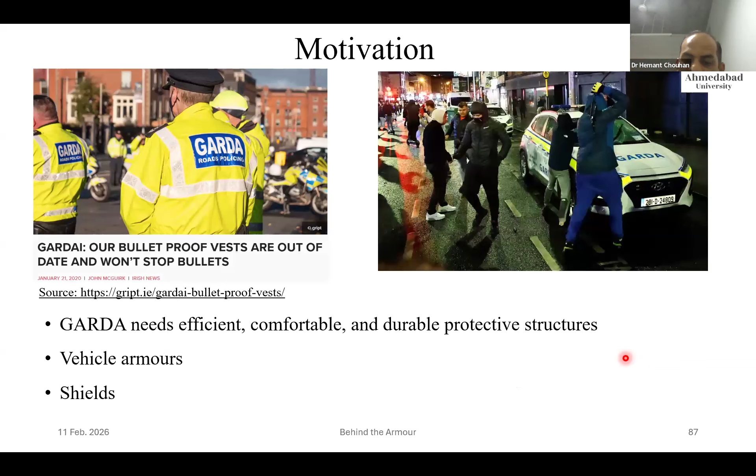After that, I had a next journey, but I'll be moving slightly faster on this one. Parallelly, a friend of mine joined the University of Limerick in Ireland, and he used to share similar things, that goons are hitting the policemen. So I thought Europe is a better place, but he had similar news over the years. So we planned, or rather the police department was looking for a solution.

So the next challenge I took was that with these traditional limitations, we need a specific set of machinery for this, which is quite a costly affair. And in the European world, their prime target is money making. So they are more interested in aerospace related research than defense related research, because of the lesser number of population and lesser number of challenges across the borders.

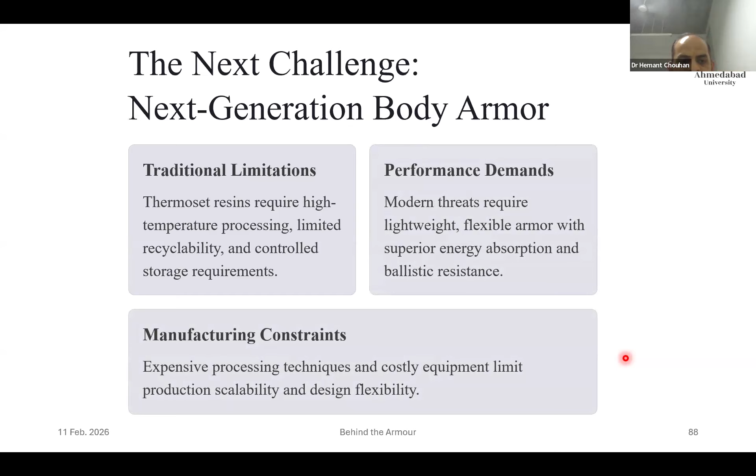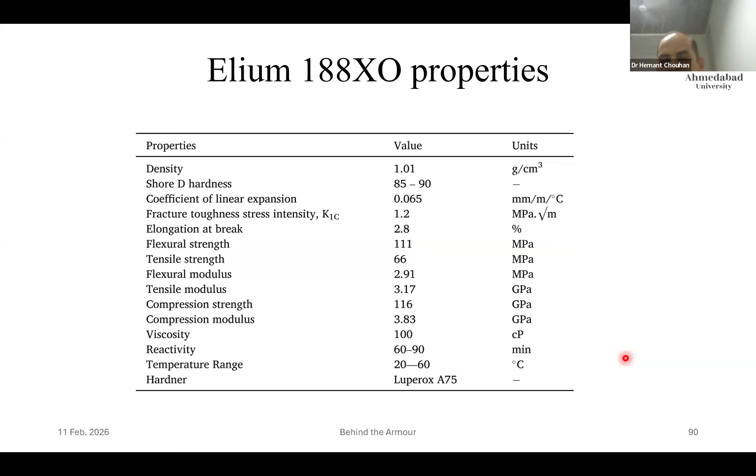So we thought of having something new, and there they have a unique kind of thermoplastic resin, commercially termed as Elium. Being a thermoplastic available in the form of liquid, and being recyclable and ductile, we thought of developing something out of it using the available resources at the university, which are not directly related to the defense kind of manufacturing, the type of machinery we look for. So using a simple RTM or VARTM and using the liquid thermoplastic Elium, which is recyclable, repairable, easy to process. These are the properties of the grade of Elium which we used.

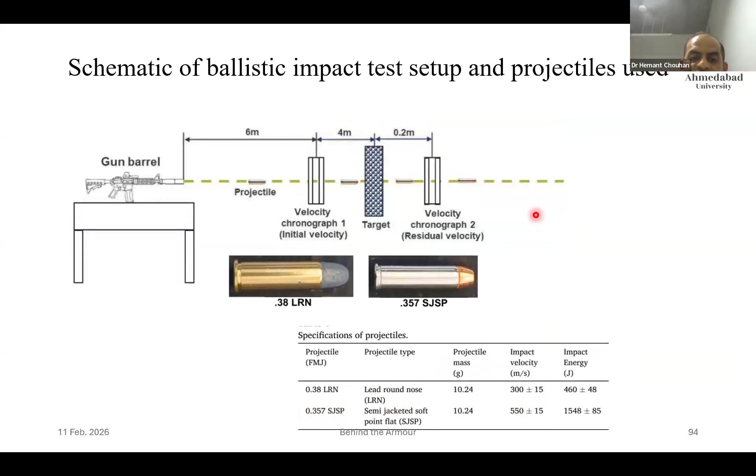So I explained to them what kind of speed and accordingly how you are supposed to test this. We did a few tests with this 2D, 3D, as in a scientific study more of, because weaving these kinds of panels is a time consuming task. So scaling up becomes a challenge. And then we performed a numerical analysis. In this case, he is having Abaqus. So we performed Abaqus VUMAT programming at our end in the absence of LS-DYNA at his place.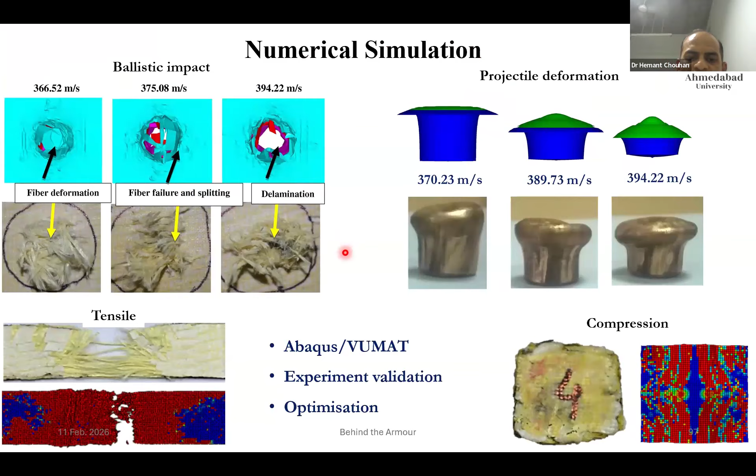All the bullets fired by 0.38 LRN, that is 300 meters per second, were stopped, and at 550 meters we couldn't. With this, we tried a hybrid version of 8 layer Kevlar and 8 layer PE, front Kevlar or back Kevlar. In both cases, interestingly, results were different. However, we restricted ourselves to 0.38 LRN at 300 so that all bullets can be stopped. And you can see, though the exit velocity is zero, the BFD, back face deformation, for one combination is relatively less compared to the other one.

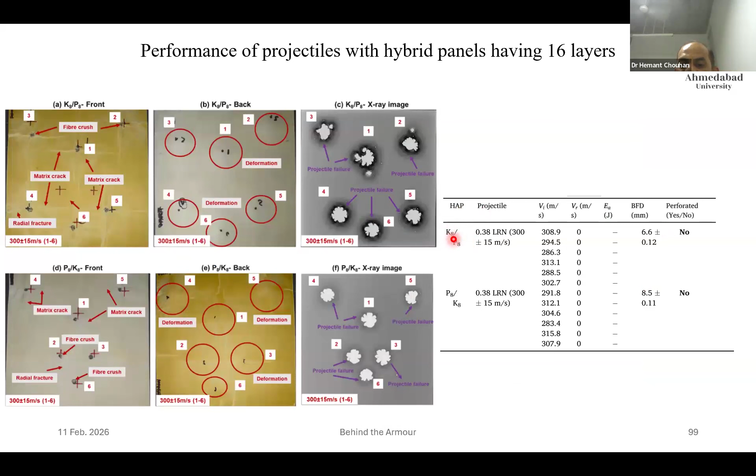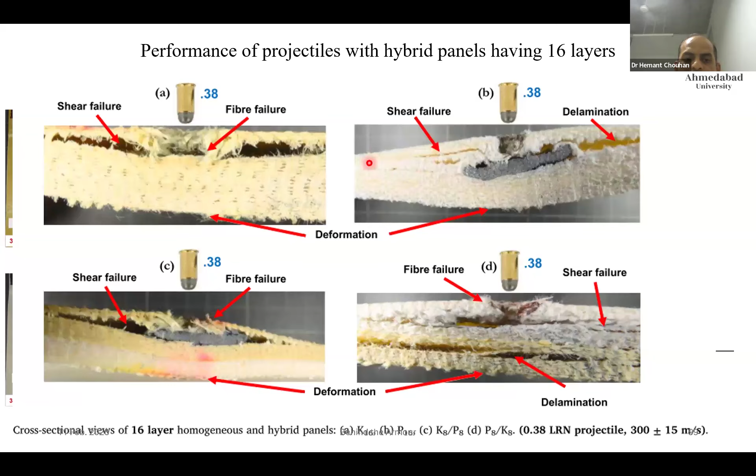I'll come back to this. PE at the back, because it stretches well, and Kevlar, because of fibrillation, absorbs the energy fast. So for that reason, the BFD here was less. This is what happens when we cut this material with water jet and see where my lead bullet is and how much damage it has produced. So we see the damage: delamination, fibrillation, fiber failure. The delamination planes in UHMWP are always multiple, compared to a single large one in the case of Kevlar.

So these studies gave us a bit of confidence, and then we thought of having a 24 layer system based on our past studies. Still we found the same, that 550 meters is beyond discussion and it will perforate. However, for the 300 meter bullet, that is 0.38 LRN, the BFS came down significantly. The projectile was damaged significantly because of the higher number of layers, as demonstrated in this X-ray image, and these petals remain the same for the PE side or the pure PE.

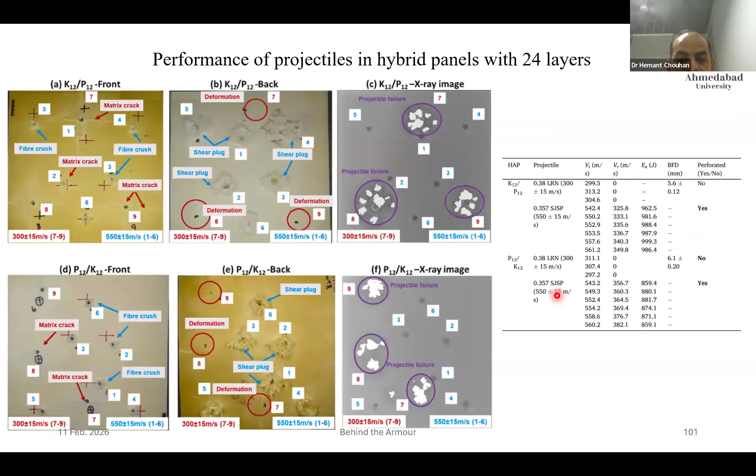And then we did a hybridization of the two, that is Kevlar 12 layers and PE 12 layers, and the X-ray of that. Again, the same results: we may slightly bring the residual velocity to lower numbers, but stopping is not done. But the other one continues to stop. We could find what kind of damage, shear plugging, fibrillation, stretching, those are the things which an academician or a researcher is interested in. These are quite good studies that can be done for a variety of existing as well as newly designed materials. And this is how the damage propagates.

And this shows how the damage happens when there is a residual velocity. In case of Kevlar, it is fiber crush, shear plug, shear failure and fibrillation. Whereas in this case, the fiber crush and the way it is happening and the delamination plane are significantly different. For the hybrid system with the front of UHMWP and with the front of Kevlar, things are slightly different, and that is the reason your residual velocities were slightly varying. But with this kind of hybridization, we can develop a better solution.

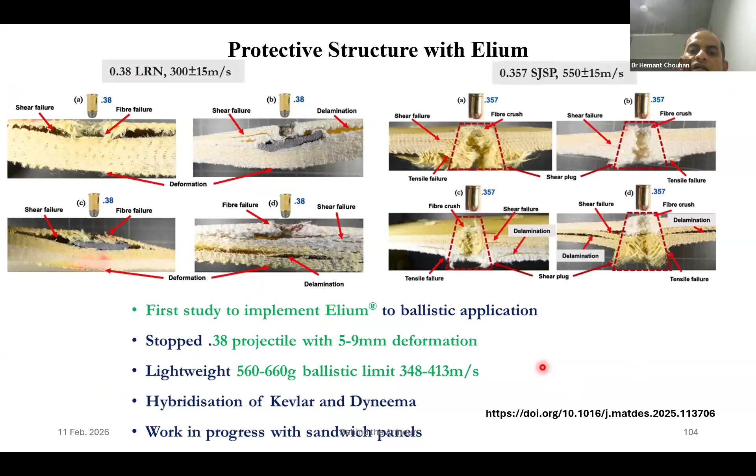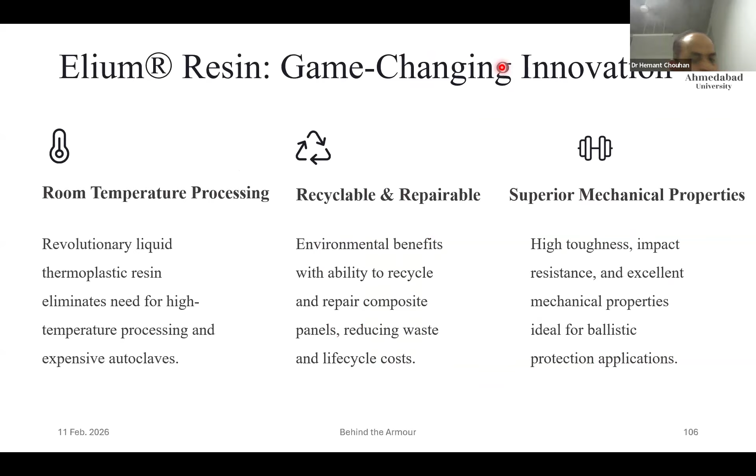So we could conclude that the important thing was that this was the first study using Elium for ballistic application, and thankfully we could give this as a solution to the Ireland police. That is, we can stop all the projectiles fired, 0.38 LRN at 300 meters per second, and we have got these many weight-possible solutions without any perforation and at a very low backface signature. This material being recyclable and room temperature processable, the manufacturing cycle becomes very comfortable. And hybridization of Kevlar and UHMWP has led to a better solution, having 6% higher V50 than the reverse arrangement. For time reasons, I'll have to move slightly faster and I'll request 5 minutes additional if possible.

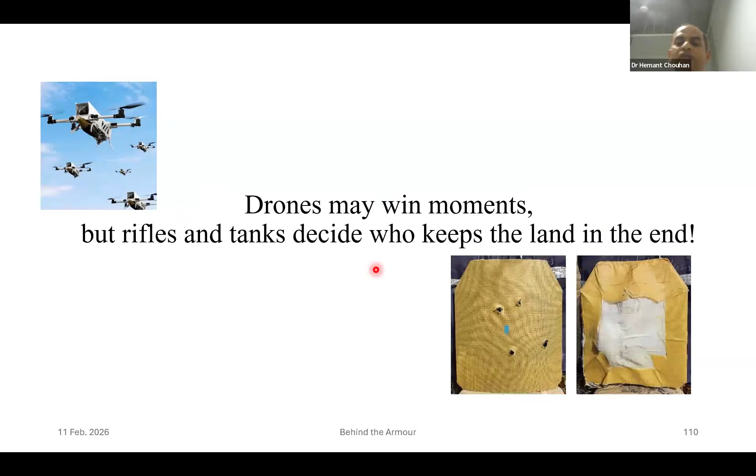In my journey, every now and then I come across the statement that the world is of drones, but a drone may win a moment. It's the rifleman and the tank person who will hold the land. So bulletproofs are inevitable, because without a human, you cannot hold your land.

For those who are interested in material research, material science, nanotechnology and biomimicry are the key areas wherein one can work, along with integration of sensors and self-healing materials for a better future. They can be considered as part of material science. These are a few key things which one can think of. But what I am working on now is looking at an even better bulletproofing material, which I'll migrate to the commercial world as well.

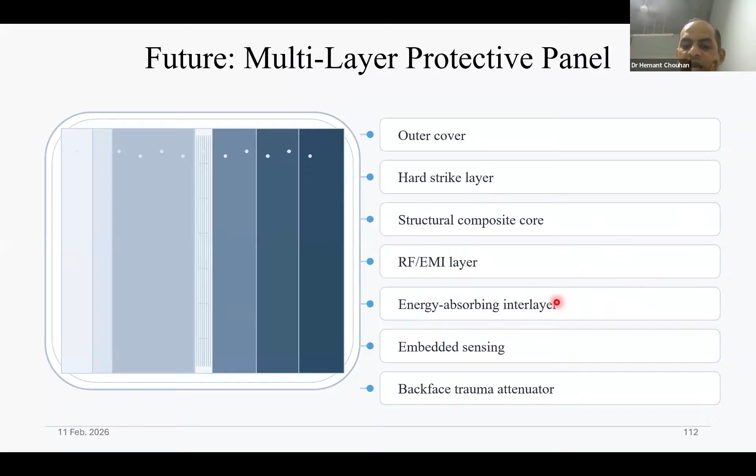That I'm looking for a hard strike, fine, a composite core, yes. Then we require RF and EMI shielding for a variety of other devices which have electronics in them. Then we require signature resistance, that is your stealth and anti-stealth. Stealth technology is a must in many cases, along with the embedded sensor. So these are a few areas I am working on now.

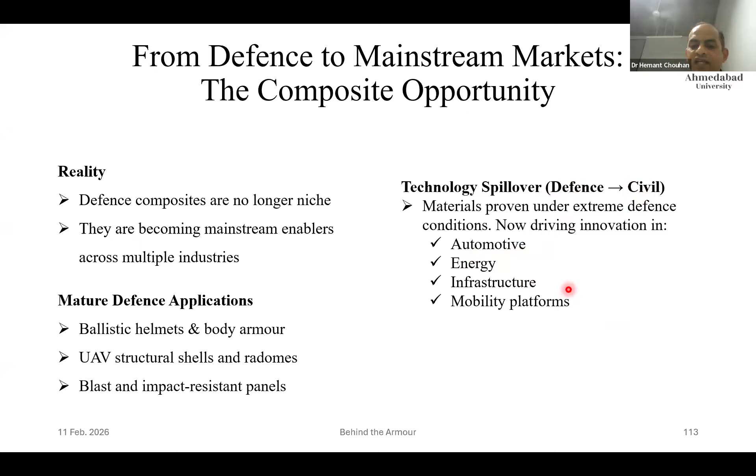And in reality, the defense to market. Okay, I'd like to directly switch to this: these defense composites are no longer niche, or at least according to me, they are not. With the help of an example, I would like to show that these technologies can be taken from defense to civil. These are a few areas like automotive, energy, infrastructure. They have a similar requirement, but we feel that defense is a different world and civil is a different world. It is not. And with respect to one example, that is EV, I would like to discuss.

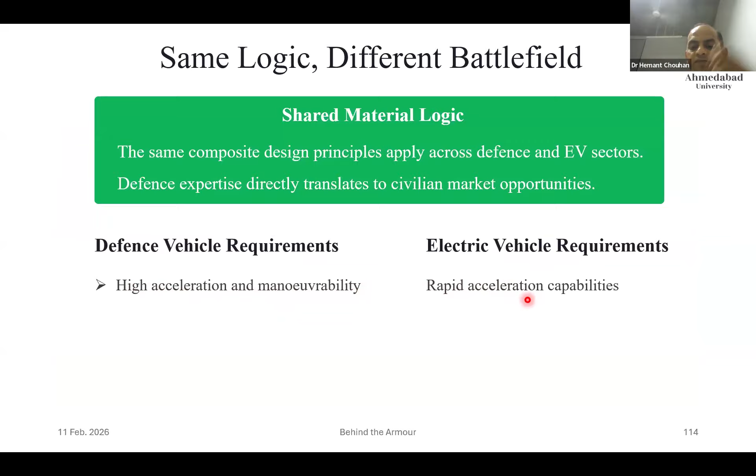Then battery enclosures, lightweight monocoques, energy absorbing structures. These are a few applications wherein the requirements are typically identical. So I would like to take this one: in defense, what you are expecting from a blast proof vehicle is an example where your defense expertise can be directly utilized for the civilian market. Do we require high acceleration and maneuverability? Yes. But in EV, we require rapid acceleration capability. It's the same.

The maximum occupant protection. Don't we require passenger safety in a car? It's exactly the same. Minimum weight for maximum performance. Don't we require the largest possible range per battery charge? Or we call it optimization of weight. Here we are looking for ballistic, bullet and blast resistance. Here we are looking for crashworthiness. I'm sure everyone here knows the NCAP rating for automobiles. Here we talk of long operational endurance, and on the other side we have extended driving ranges.

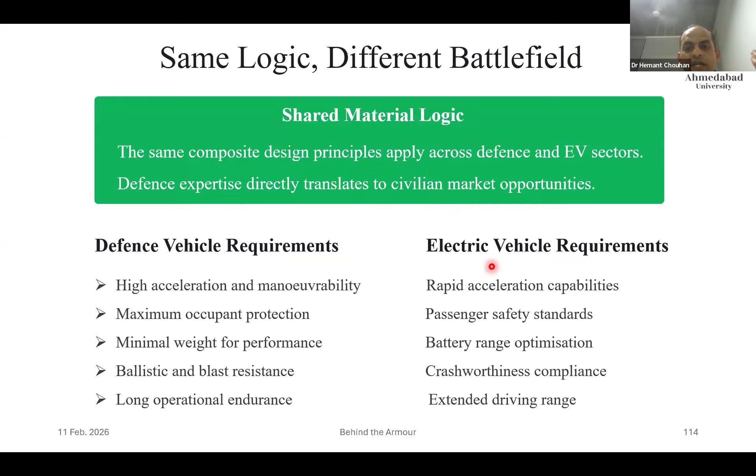So all in all, whatever is there in the defense world can, in some form or other, be translated into the commercial world also. That is how we can map between defense and the commercial world, and that way a technology developed can be utilized for the betterment of more people. And this is how I describe my journey: you can get a unique, real world problem from the defense world, and it's the duty of academia to come up with an innovative, new solution. In our case, it would be a material and manufacturing related technology, and it is the duty of the industry to develop this material, system or facility for the masses to use.

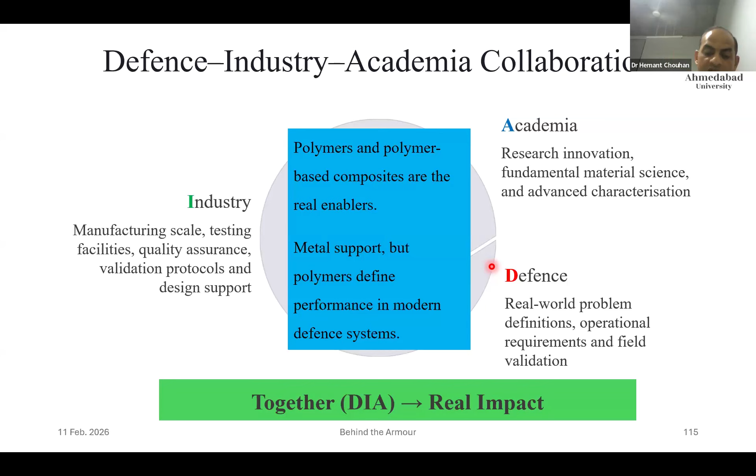And the real enablers will be you, who can develop the new material systems, because your conventional materials and metals are not going to suffice. It is where DIA, that is Defense Industry Academia, work together that we can have a real impact for a better tomorrow. So with that, I conclude, and I offer from my side that I am on a mission to develop a new generation of engineers who are keen and interested in developing new material and manufacturing solutions. Whosoever is willing in that domain is most welcome, and I'll be happy to come down to your place and support you.

Okay, good. Thank you, sir. So with that, the floor is open for questions, and I know I've had to skip a bit towards my second half of the journey. You can ask me anything. Thank you, sir. Thank you for your valuable session. I would request the participants to ask their queries. Hello, sir. Yeah, sir, please go ahead.

Sir, this is Dr. Arun Karthikeyan speaking here, sir. Actually, I want to tell you it is a wonderful presentation, sir. A crystal clear explanation of each and every slide. Thank you so much for giving this knowledge to us, sir. Now we are understanding the importance of composites, actually. We are adding two or more materials, and we are making so many things. In terms of applications, it is completely appreciable, sir. In this way, you are great, sir. Thank you so much.